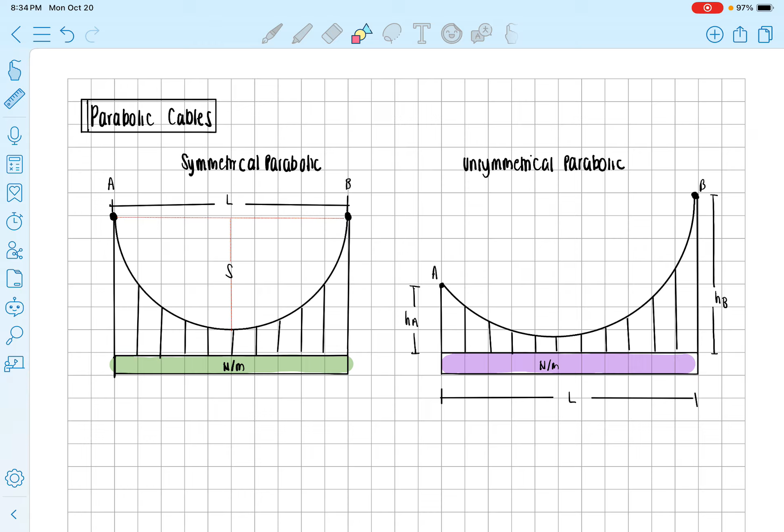Okay? So dumako muna tayo for the parabolic cables guys. For parabolic cables, simply we have two. Okay? The symmetrical, and of course the unsymmetrical. Okay? Or unsymmetrical parabolic.

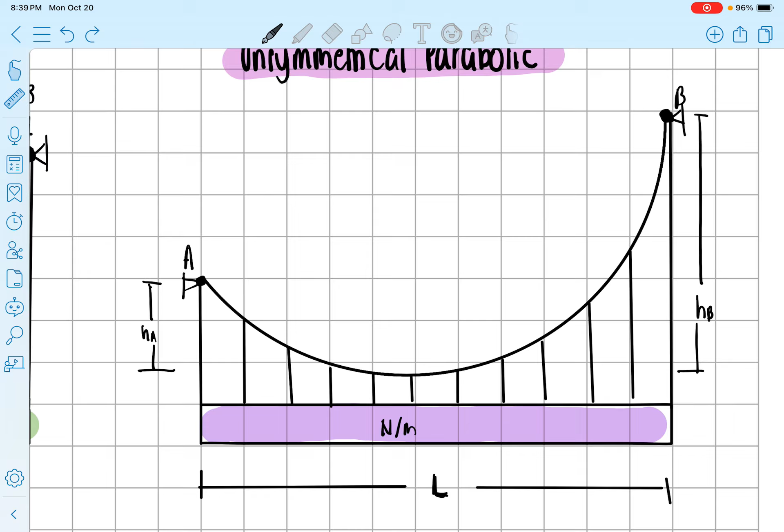Ay, ayan na naman yung ads natin, nakita na naman.

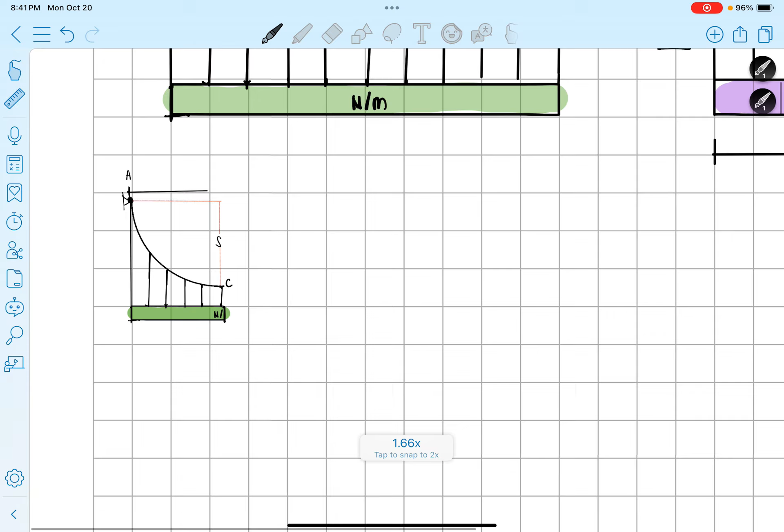So, paano yun, guys? Let's suppose this is point C. The lowest point is the point C. So, ABC, okay? Same with this one, this is point C, okay? Ngayon, ganito lang yan. Ano ba yung mga kadalasan tanungan dito? Una is the minimum tension.

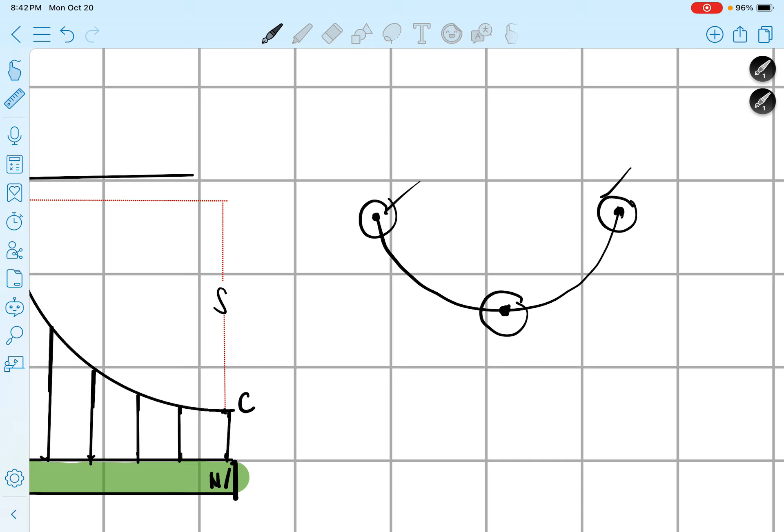And by the way guys, by principle, especially pag cables, is always what? Is always tension. Ibig sabihin pala that at the lowest point, meron ka ngayong tension dito, tama? So, tawagin natin siya as TC. This will be your tension C. And then, this is L over 2 kasi hinati natin siya. This is L over 2.

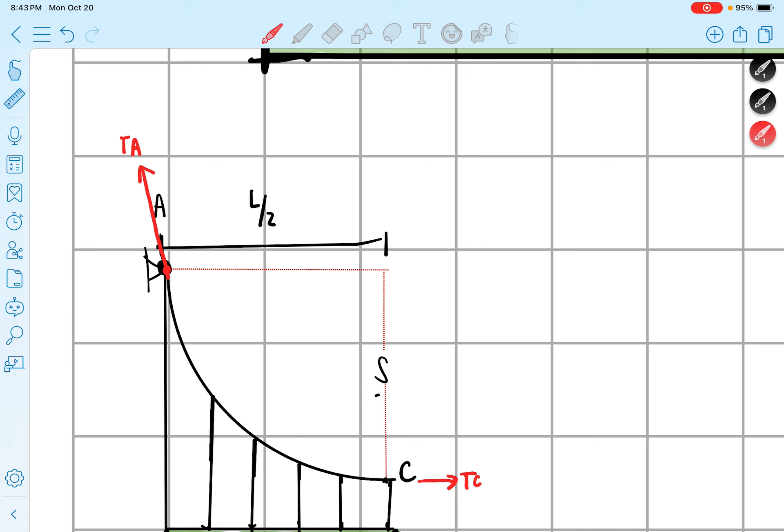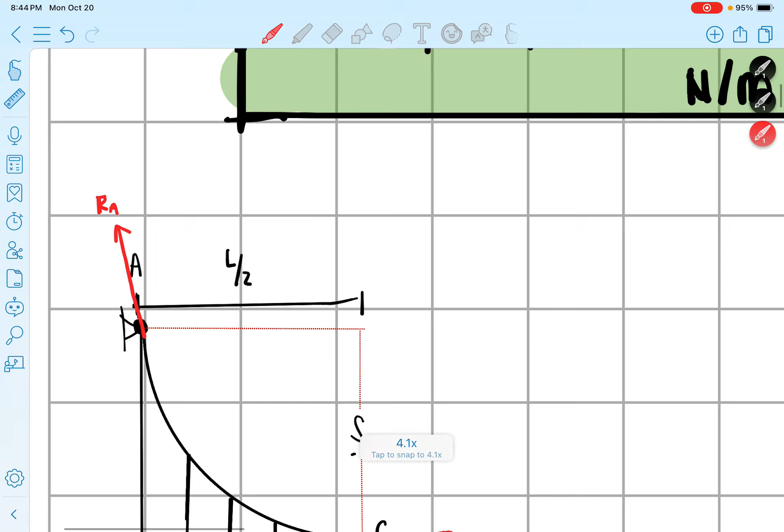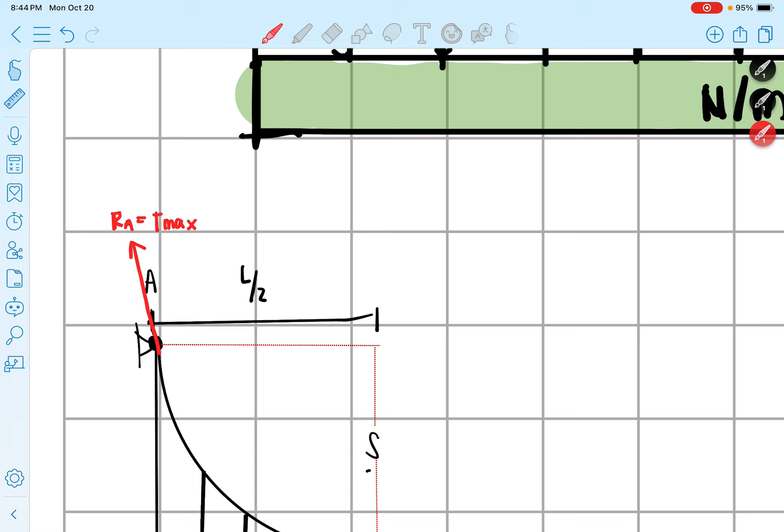So, that's your TA or the tension at A, or the reaction at A. Sabihin natin pala that this is reaction at A. Yung reaction at A natin na to is simply siya yung maximum tension natin. Di ba, sinabi ko kanina na hawakan mo yung dulo, may bigat doon. So, ito yung T maximum natin. Nagkakaintindihan? And then dito sa pinakailalim, dyan mo naman matatagpuan yung tension minimum mo.

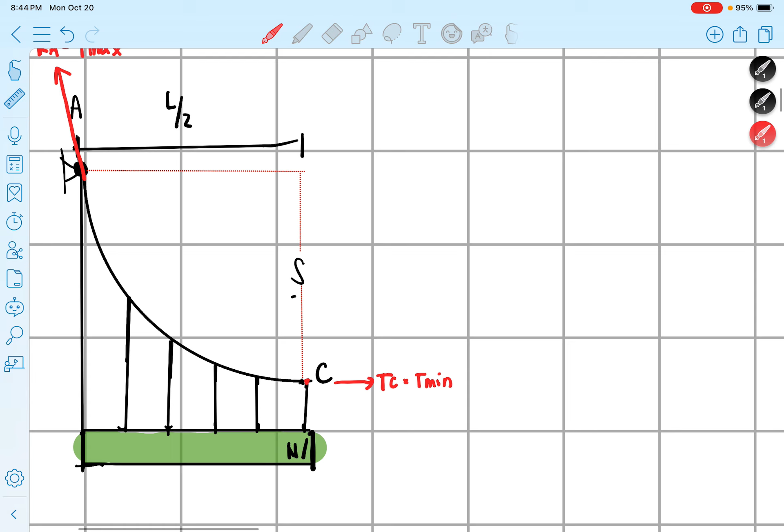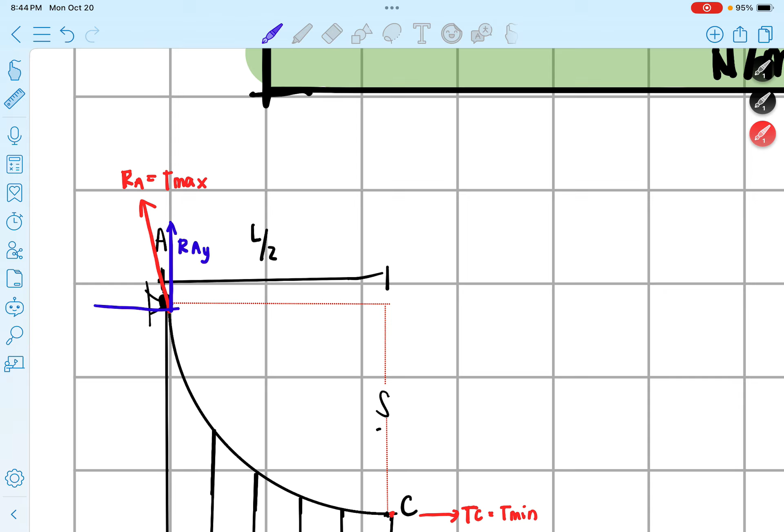Are we clear? Okay, guys. If you look at it carefully, isn't it that your T or your RA here can produce components which is the RAY and of course the RAX. Clear? So that's it, that's what we get.

That's going to be our working equation. First, guys, what might be asked here is to determine the maximum tension or determine the minimum tension, determine the reactions at A, something like that. Again guys, when they ask for the reaction at A or the Tmax, it's the same thing, because at this point, this is where you have the biggest resisted tension force.

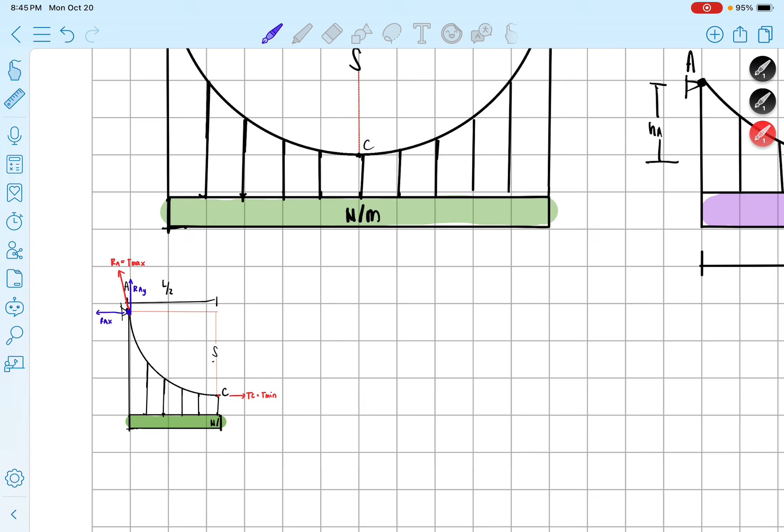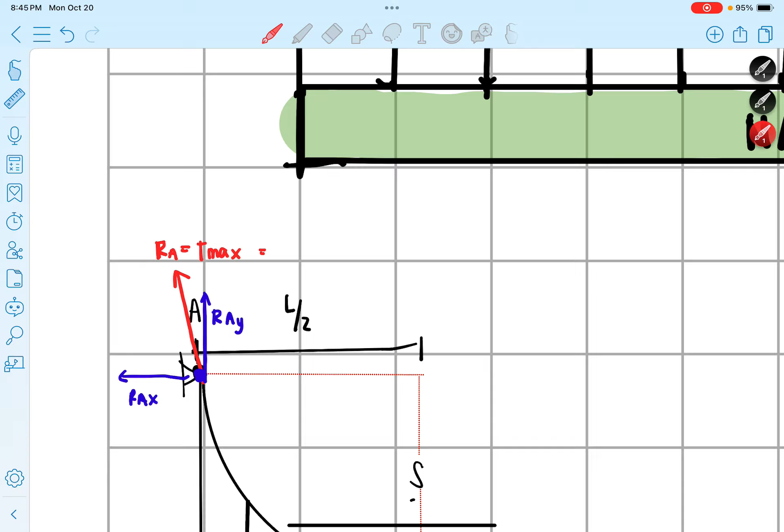Okay, so for example, calculate the reaction force at A - you would find the RA. Now, for the next problem, calculate the maximum tension. And since you know this is symmetrical parabolic, simply your RA is equal to Tmax, which is where the biggest tension is, and also equal to RB.

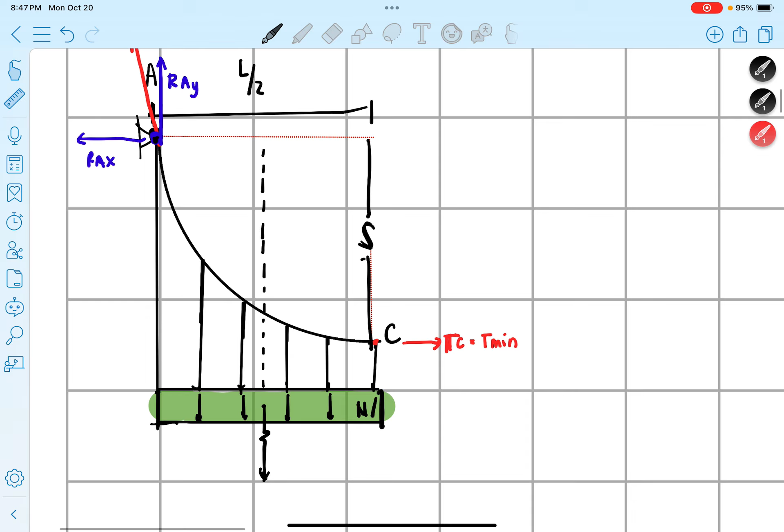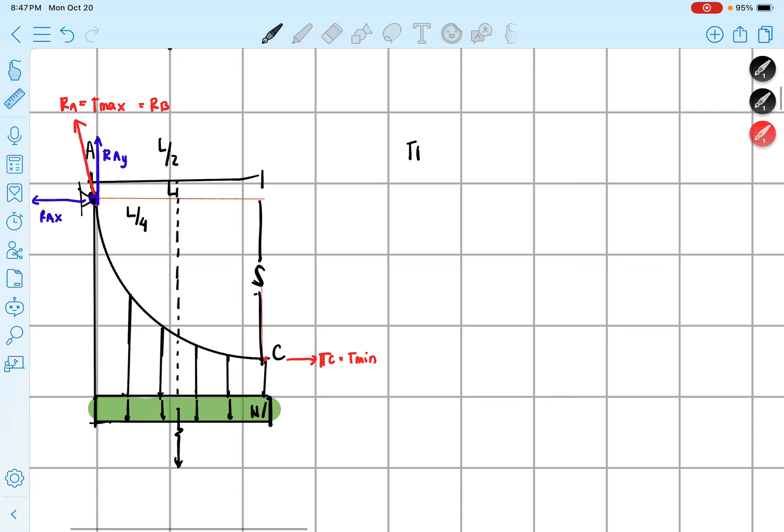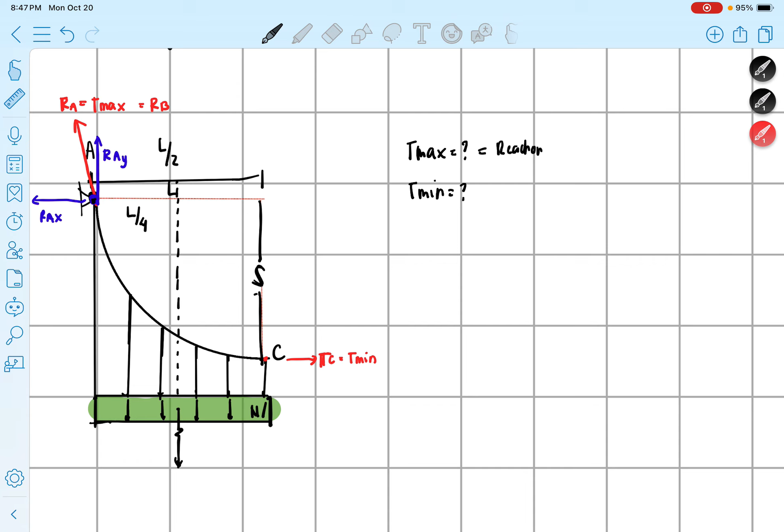So let's say what's being asked here is Tmax, T minimum. This can also be equal to the reaction at A, or the reaction at B. It can be like that too. What else? That's it, that's all for the symmetrical case.

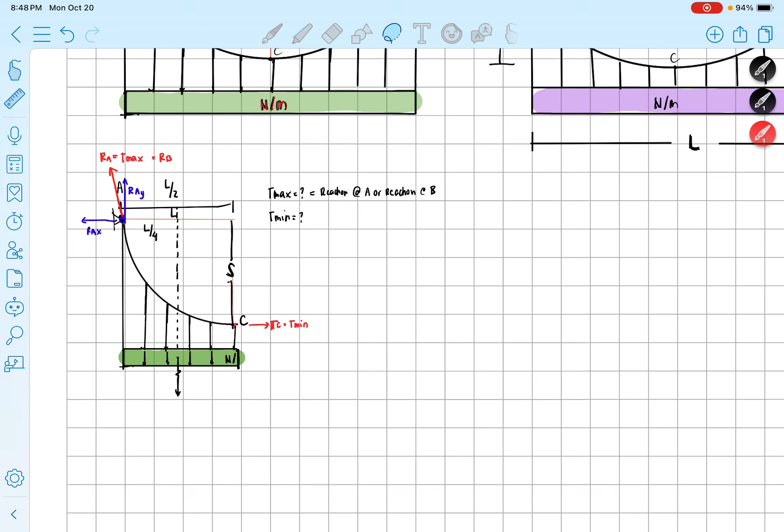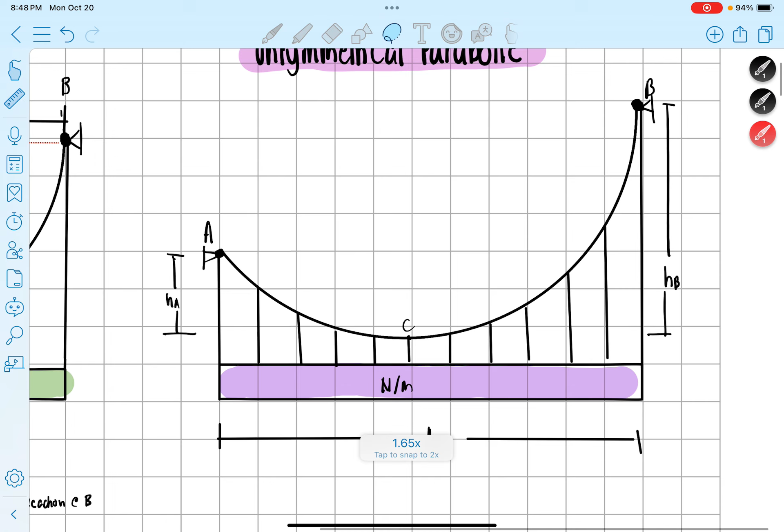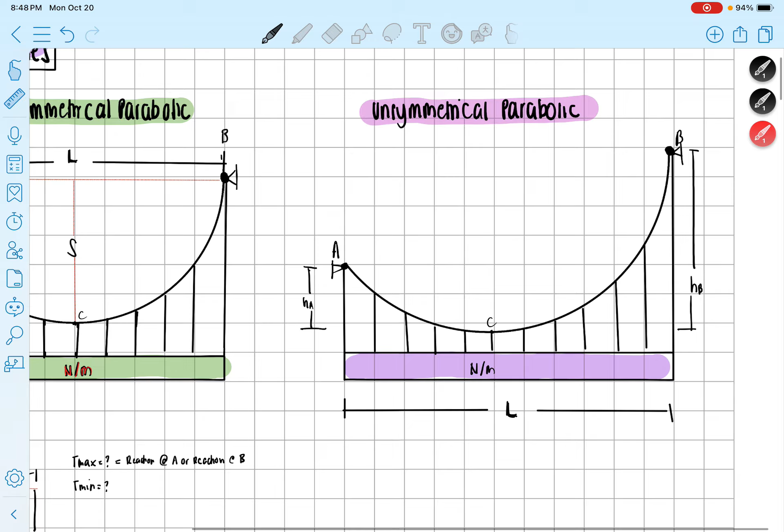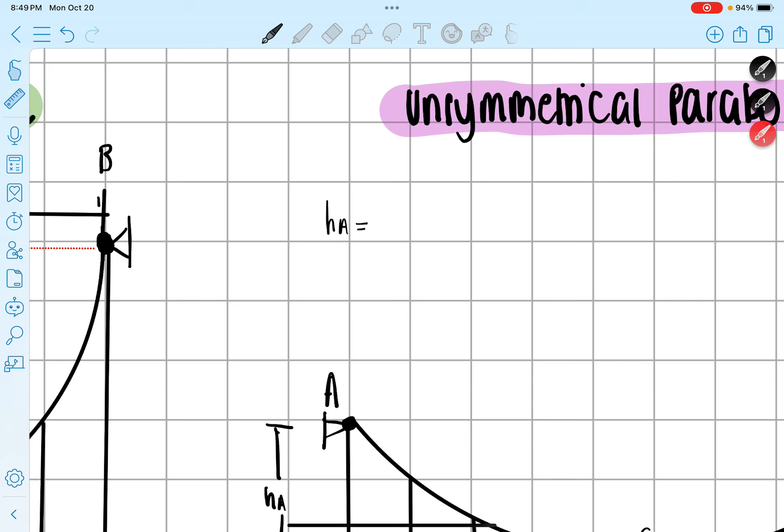Okay, since the parabolic cable is unsymmetrical, that means the height of A and height of B are not equal. Let's say, guys, that HA is not equal to HB. Right. Therefore, the TA or the RA is not equal to TB or the reaction at B.

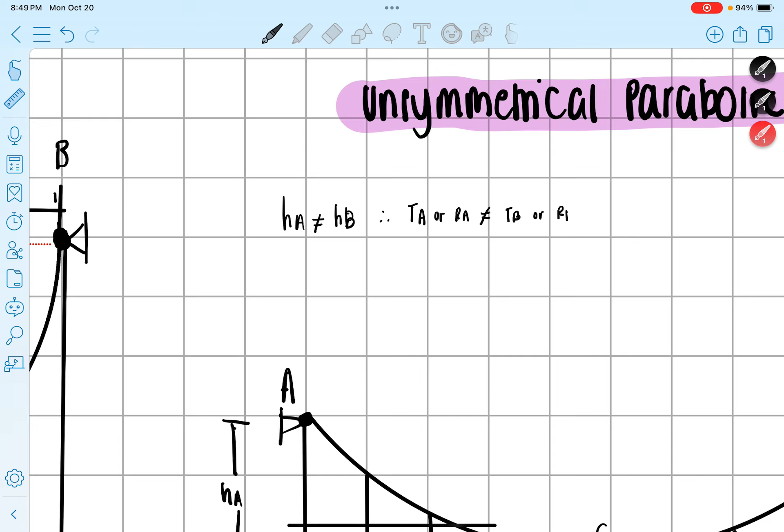Do we understand each other? But guys, their T-min, okay, their T-min is equal on both left and right. Because guys, it's the same on both sides there.

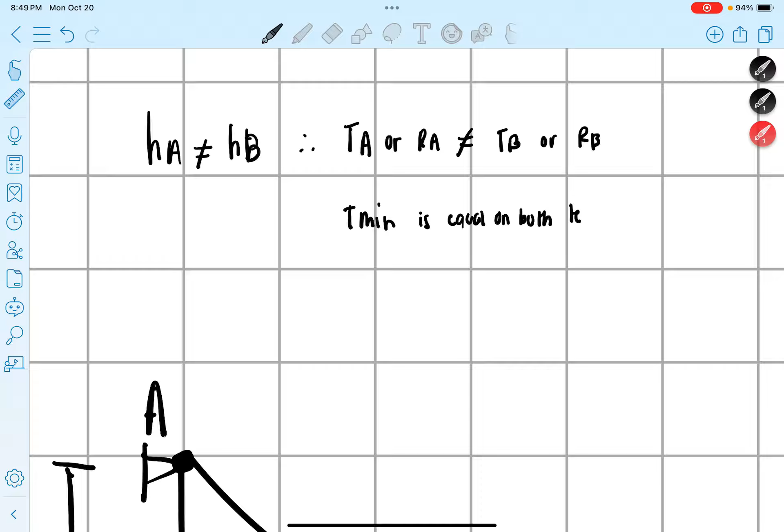Yung T minimum nila, pagka pinutol mo yan sa gitna, hindi sa kasi gitna yan. Pag pinutol mo sa lowest point nila, dito, at this point, equal lang na experience na minimum tension at both conditions, both left and right. Equal lang naman guys yung T minimum nila. Nagkakaintindihan?

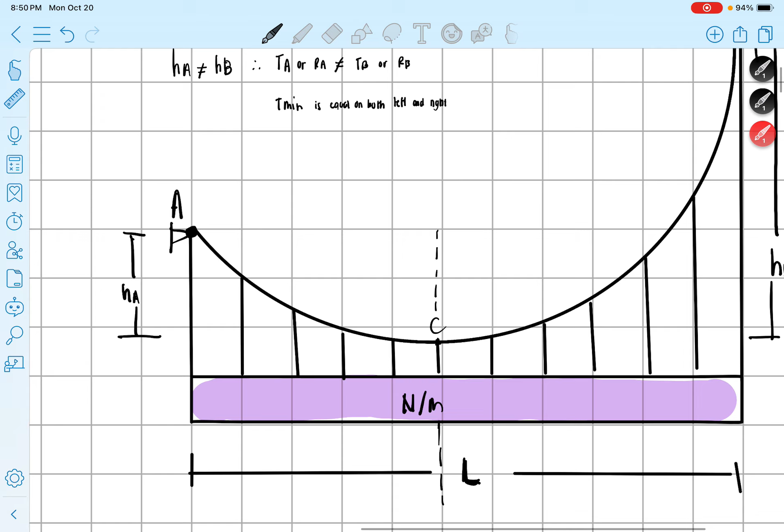Nakaintindihan. And then guys, makinig mabuti, okay? Ang pinagkaiba kasi dito, kung mapapansin nyo, hindi mo pwedeng sabihin na etong portion na to is L over 2. Hindi pwede yan, mali yan, okay?

Kasi guys, kung mapansin nyo, hindi naman symmetrical. So pag finold mo yan, kung mapansin mo, mas maikli ka sa part na to, kumpara sa part dito sa kabila. Nagkakaintindihan? So ibig sabihin, hindi mo pwede hatiin lang yung length L mo.

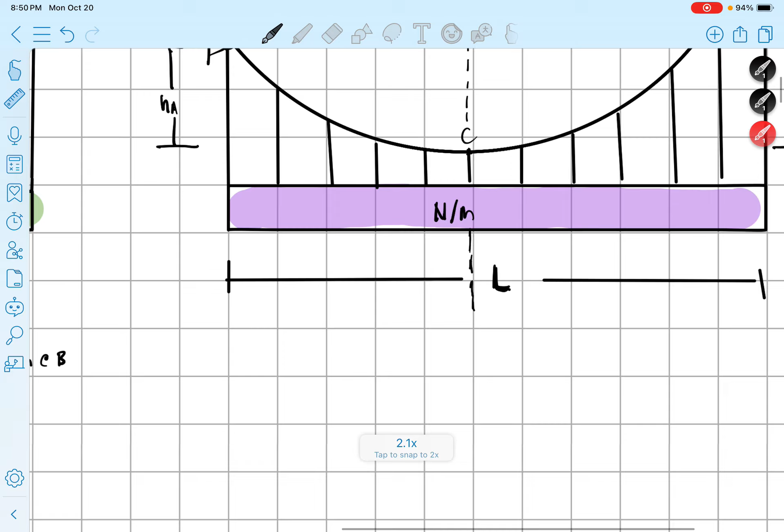So gagamit ka ngayon, use the square property of parabola. So basically guys, gagamit ka dito ng square property of parabola.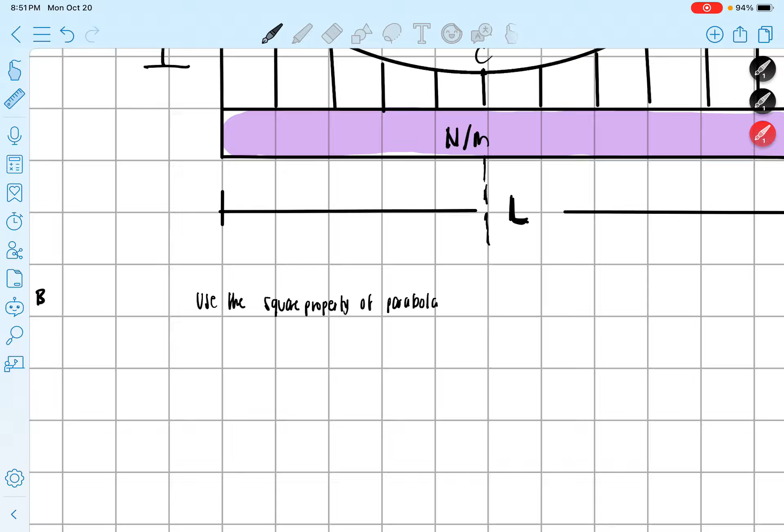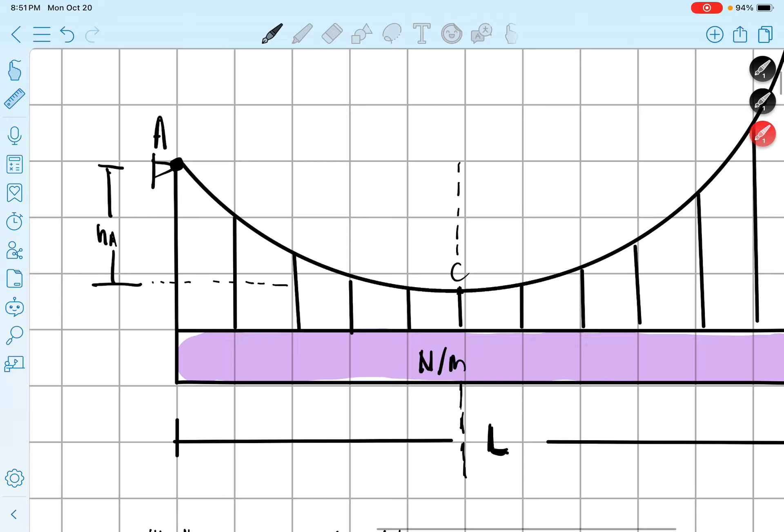Okay? So ibig sabihin if binigyan ka ng height, tingnan nyo guys ang height natin dito is doon sa may lowest point of your parabola. I don't know if na-encounter nyo na before yung square property of parabola, but dapat kabisaduhin nyo to because isa pa to sa pinakamaraming applications.

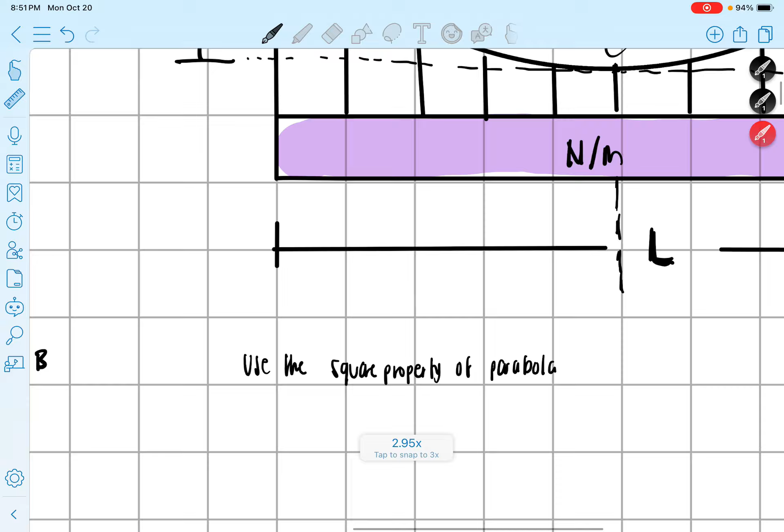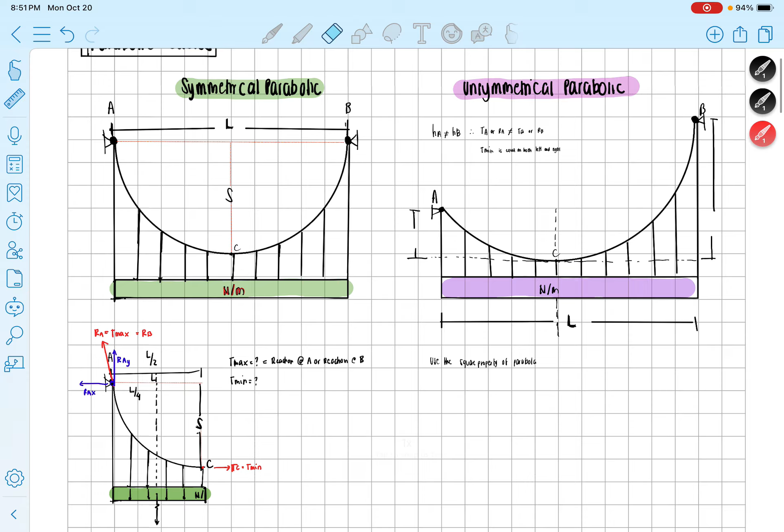Ngayon guys, kung mapansin nyo, HA or height ng A, sabihin na natin YA na lang para mas maging uniform yung formulas natin. So this will be your YA, and then this will be your YB. And then guys, if this is L, pwede ka naman mag-set dyan.

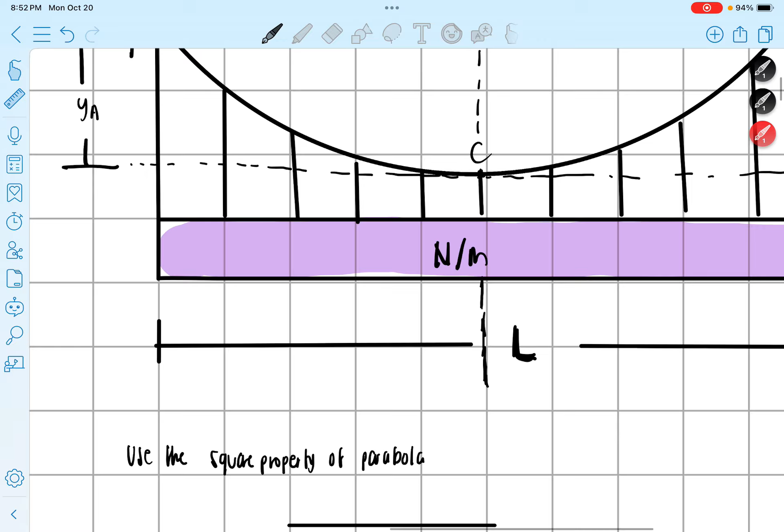Sabihin na natin i-ano natin that this is your X. XA, sabihin natin kasi nasa left side ka, papunta ka dun sa A. And then sabihin na natin that this is your XB. Kung mapansin mo guys, kapag ka-inequate mo yan, yung length mo minusan mo ng XA, siya yung XB mo.

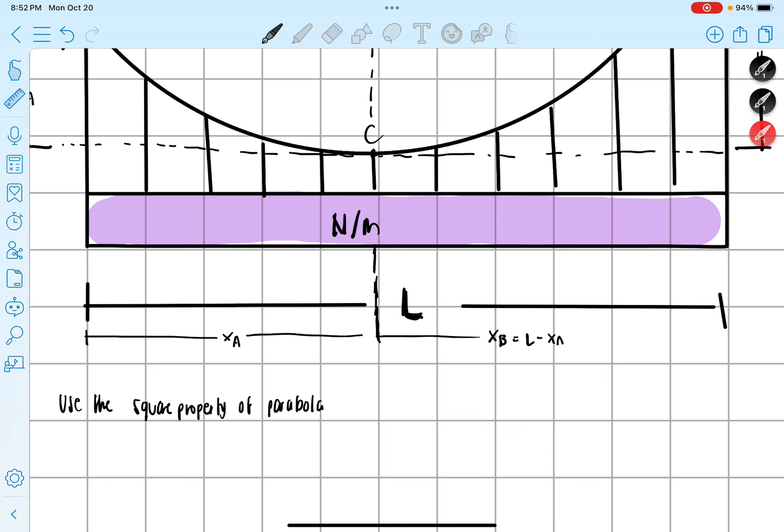Nagkakaintindihan? So ang square property of parabola, ang form niya is ganito: X1 square over Y1 is simply equal to X2 square over Y2. Okay, pwede nyo kabisaduhin yung process na to, wala naman ng problem doon.

So kung mapansin nyo, sabihin natin that this is your 1 and this is your 2, okay? Yung right side is 2, yung left side is 1. So ibig sabihin, yung X natin dito will be XA square. Over, ano ngayon yung Y1 natin? Ang Y1 natin basically is this one, the YA. And then para naman sa X2 square natin, basically guys, XB yan.

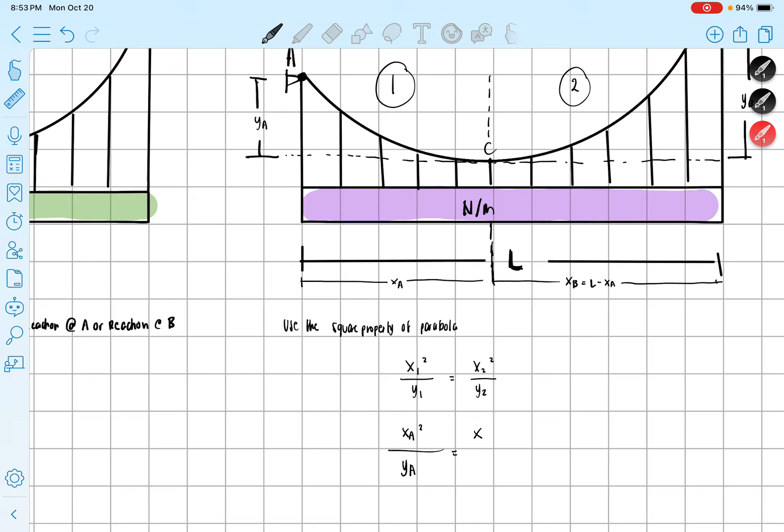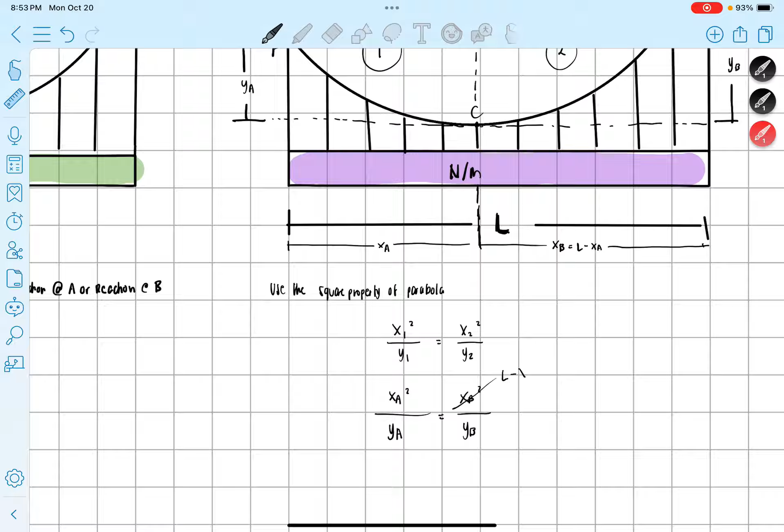Over YB. Pero guys, kung mapansin nyo, kailangan mo i-represent itong isa na to as XA natin. So ibig sabihin, yung XB natin, di ba, is equal to L minus XA. Okay, so ang final form, and then square. Ang magiging final form natin dito is XA square over YA is equal to L minus XA square over YB.

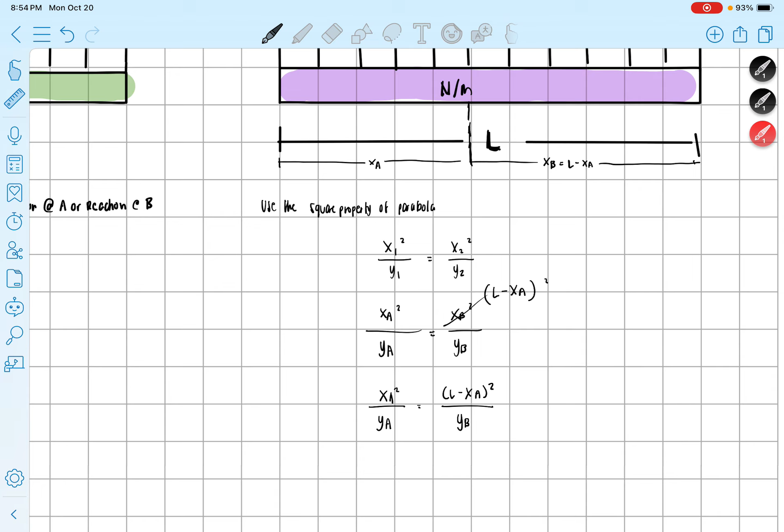At by the way guys, yung L, YA, and YB are most of the time given. Okay? So ibig sabihin, yung X lang nga nagkakaroon ng variation dito because hindi sila symmetric. So kung ganun yung approach natin, basically guys, same lang sila ng T-min.

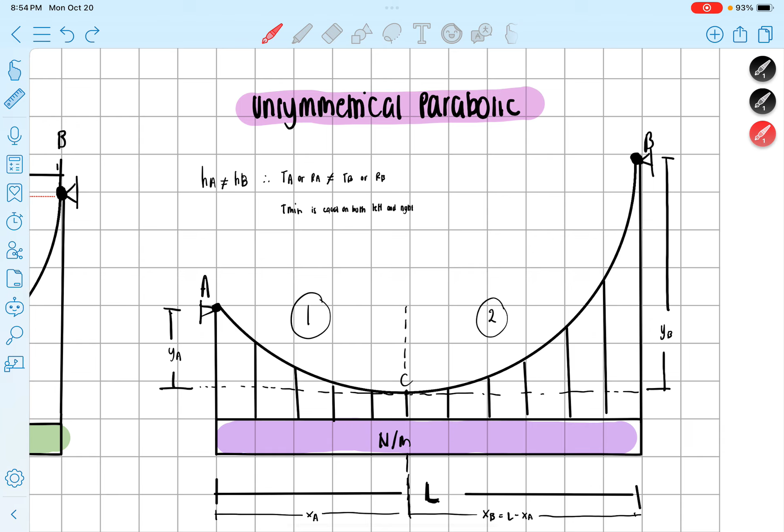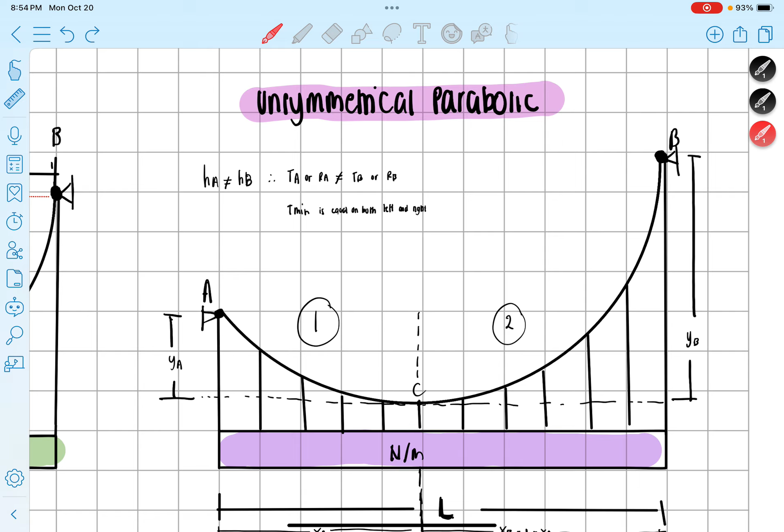Okay? Nagkakaintindihan? O, pero pagka sinabi, what is the maximum tension sa left side or sa A, o di eto yun. Okay? But again guys, pag kinumpute mo yan on both ways, lalabas dyan na pinakamalaki yung value na makukuha mo dito. So basically ganun lang din, hatiin mo sa dalawa, dito mo siya gigitna, hindi siya gigitnaan, like putulin mo siya on the lowest point and solve for each side kung ano ang pinapahanap, either left side or right side.

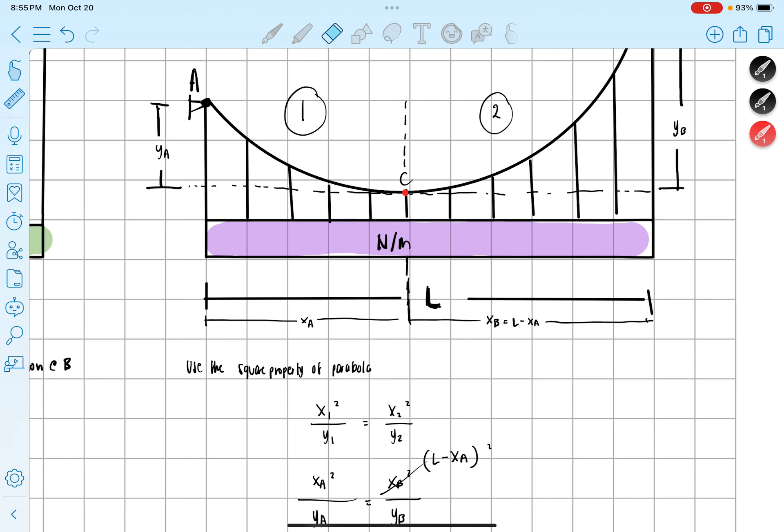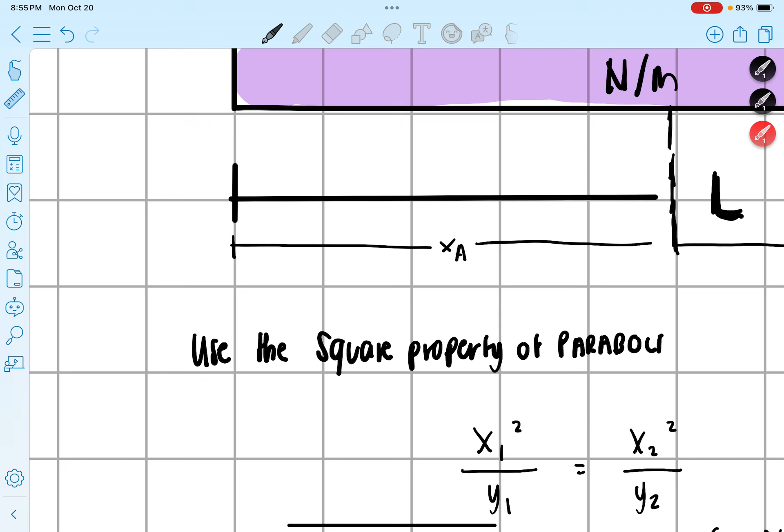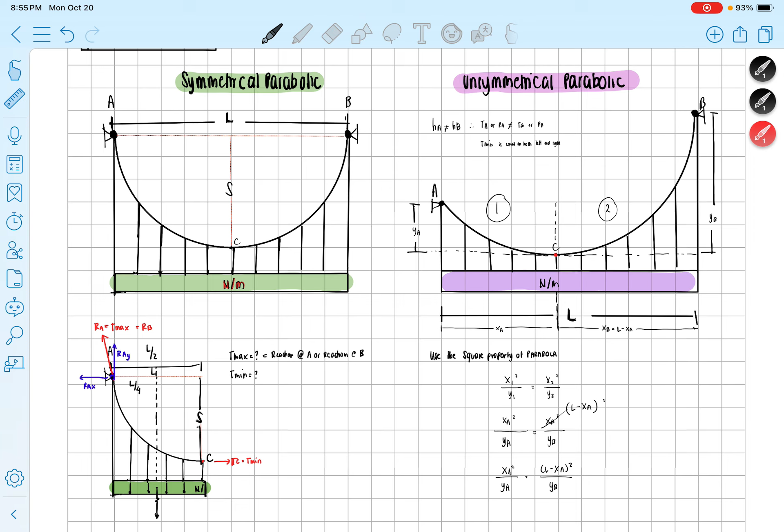But again guys, please use the property or the concept of the square property of parabola. Okay? Nagkakaintindihan. So I think that's it, yun lang naman. At siguro mas okay if i-apply na natin sa pagsasolve ng ating mga sample problems. Okay?